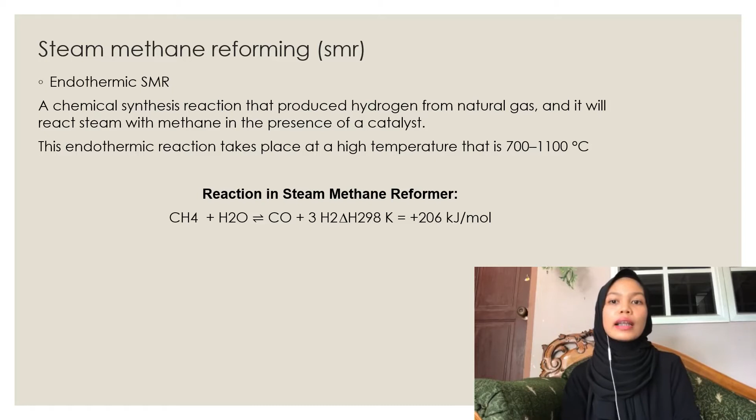The first step is endothermic SMR. This reaction is a chemical synthesis reaction that produces hydrogen from natural gas, and it will react steam with methane in the presence of catalyst. This endothermic reaction usually takes place at a high temperature, around 700 until 1100 degrees C.

The second step is exothermic water-gas shift reaction, or WGS. It is an exothermic reaction that reacts carbon monoxide and water vapor to form carbon dioxide and hydrogen. This reaction runs at a lower temperature, around 200 until 400 degrees C.

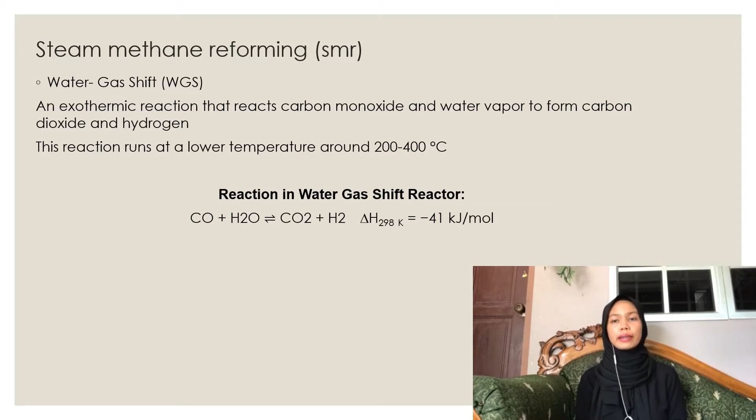As mentioned, steam methane reforming is a catalytic process, and it uses active metals to increase the rate of production because catalysts can speed up the reaction. Based on the article Kinetic Study and Modeling of Steam Methane Reforming, catalysts such as nickel and ferrum were added in aluminum oxide form to speed up the rate of reaction.

The catalyst that we decide to use in our plant design is 18 weight percentage of nickel aluminum oxide. The reason we choose nickel-based metal is because it can withstand a very high temperature, up to 1100 degrees C, and it exhibits good mechanical strength.

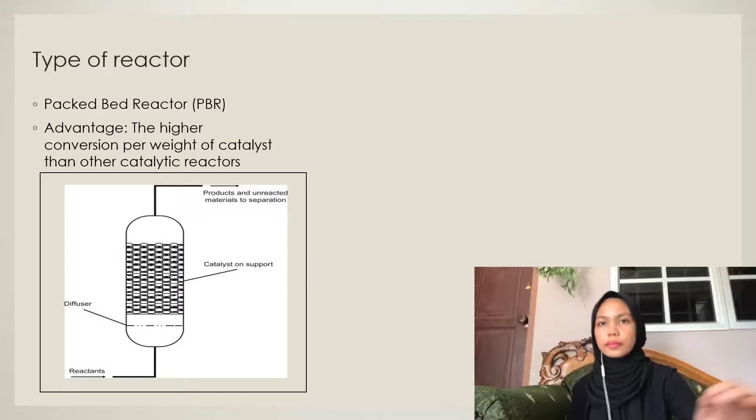The type of reactor we have chosen for our plant design is packed bed reactor, or PBR. The advantage of using packed bed reactor is the higher conversion per weight of catalyst than other catalytic reactors. The conversion is based on the amount of solid catalyst rather than the volume of the reactor.

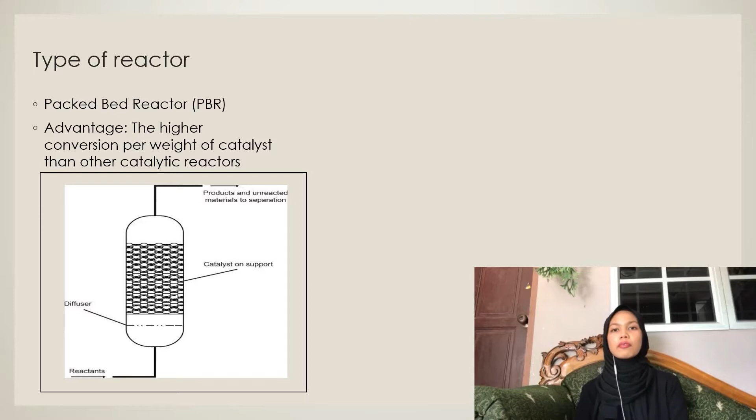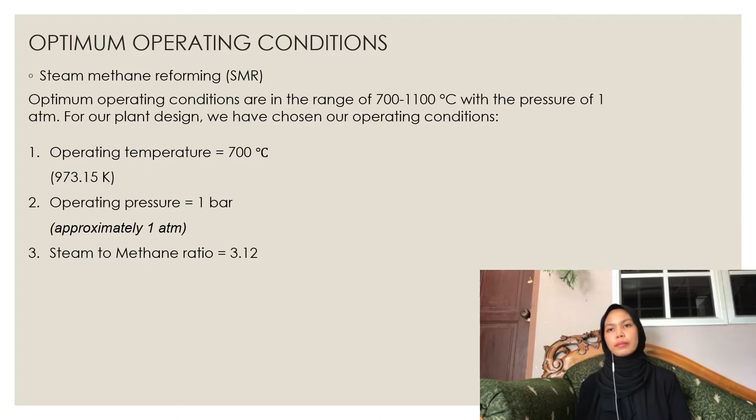According to Abbas, Dupont and Mahmud, for a steam methane reformer with a nickel-based catalyst, the optimal operating conditions are in the range of 700 until 1100 degrees C with a pressure of 1 atm. For our plant design, we have chosen our operating condition: operating temperature is 700 degrees C, operating pressure is 1 bar, approximately 1 atm, and steam to methane ratio is 3.12. The optimum operating condition for the water-gas shift reaction is around 300 until 400 degrees C.

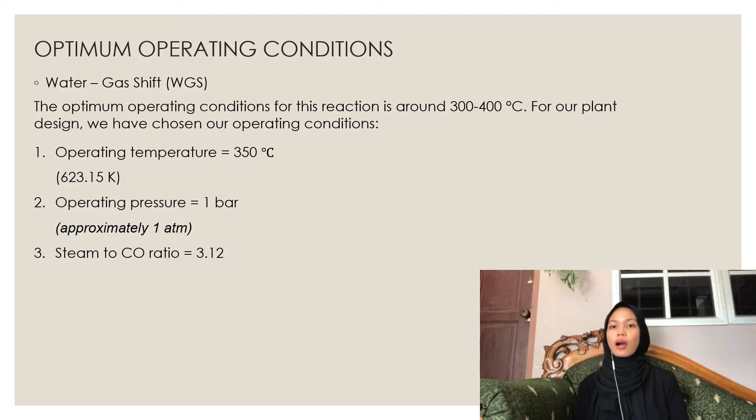For our plant design, we have chosen our operating condition: operating temperature is 350 degrees C, operating pressure is 1 bar, and the steam to CO ratio is 3.12.

Right now, I'm going to talk about the overall system design of the hydrogen production plant. Based on the process flow diagram, the PFD, CH4 enters the SMR reactor and reacts with H2O to produce CO and H2.

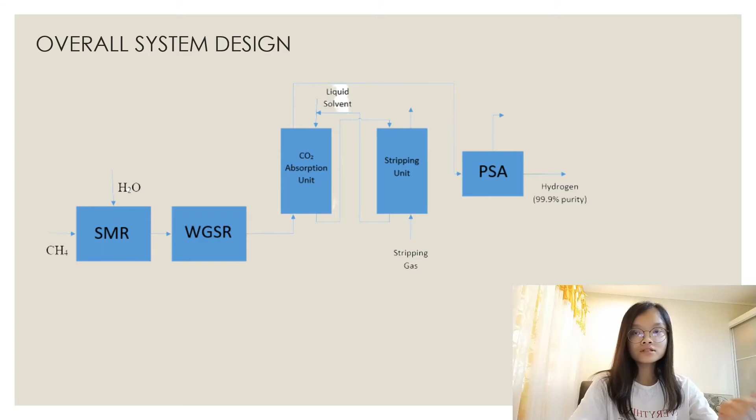The outlet gases of the SMR are then sent to the WGSR, where CO will react with H2O to produce CO2 and H2. So in the outlet of the WGSR, there are actually 5 gases, which are CO, CO2, H2, CH4, and H2O.

Since we are going to get a purity of 99.9% of hydrogen gas, we have to eliminate the undesired gases one by one through separation units.

First, these outlet gases of WGSR are sent to the CO2 absorption unit, where only CO2 will be removed. But the percentage of removal of CO2 at the absorption unit is not 100%, meaning it is impossible to achieve 100% removal of CO2 at the CO2 absorption unit. This means that at the outlet of the absorption unit, there will still be CO2 remaining, although the amount has been reduced.

So this outlet gases of CO2 absorption unit is then sent to the PSA unit, where in the PSA unit there are actually around 10 units in which undesired gases will be removed one by one, and at the end you will get a final product of 99.9% purity of hydrogen gas.

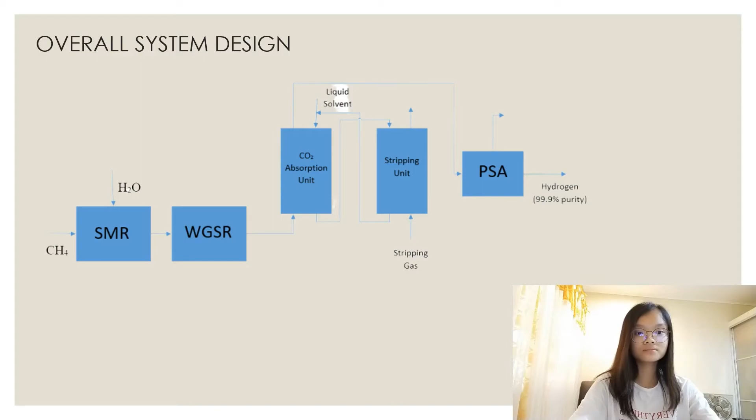So the kinetics data of the reactors are actually very important, especially when determining the sizing of reactors suitable for the production of 30,000 tons per year of hydrogen.

Right now I'm going to show the methods I used to obtain the kinetics data of both reactors, which are the SMR and WGSR.

First, derivation of the equation is performed by using the mole balance of packed bed reactor, stoichiometry, and the Rate Law equation. From this derivation, a final equation is obtained: ln(dW/FA0 dx) equals negative alpha ln(Ca) minus ln(K). From this equation, the reaction order alpha and rate constant K are obtained by plotting the graph of ln(dW/FA0 dx) versus ln(Ca).

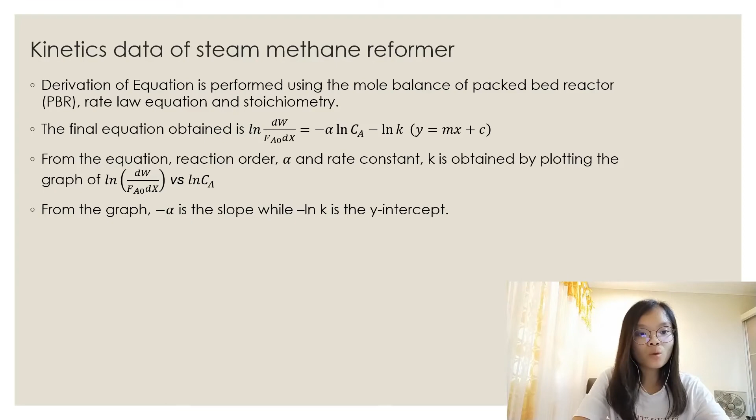From the graph, the slope is actually the negative alpha, while the y-intercept is actually the negative ln K.

To do this, a set of data of conversion of reactants X and pseudo contact time W over F naught is obtained from the article by Abbas. From this set of data, the reaction order and rate constant K can be obtained through the analysis of rate data by differential method.

By differential method, the conversion X and the pseudo contact time W over F are converted to ln(dW FA over FA naught dX) and ln Ca. From this converted data, a graph is plotted using Excel to obtain the alpha and K.

The alpha and K obtained for the reaction of steam methane reforming are 2.1058 and 4481.44 respectively. For the water-gas shift reaction, the alpha is 0.8838 while the K is 3.638.

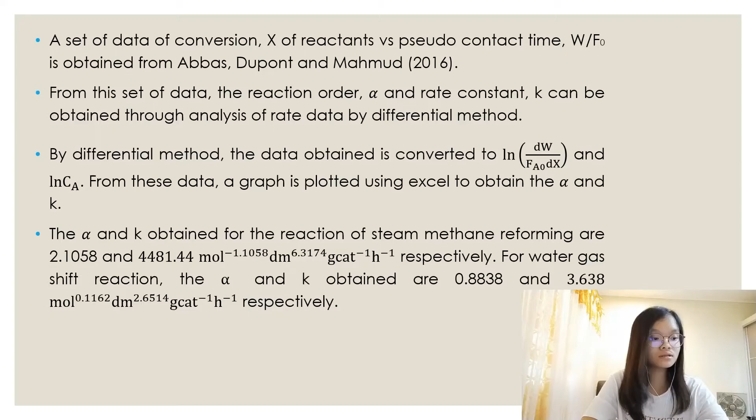The sizing of both reactors have to be determined in order to obtain the suitable size of both reactors required for the production of 30,000 tons per year of hydrogen gas. So, in order to calculate the sizing of reactor, the weight of catalyst have to be determined first by using the data given by Abbas.

The mole balance equation for the packed bed reactor is used in this case, and the reaction order alpha and the rate constant K obtained from the previous section are also used. Energy balance has to be performed in order to obtain the equation of temperature that varies with X, because this is a non-isothermal reactor, meaning T varies with X.

In this energy balance section, the activation energy has to be known in order to perform the energy balance. The activation energy involved in this calculation is obtained from the article by Abbas.

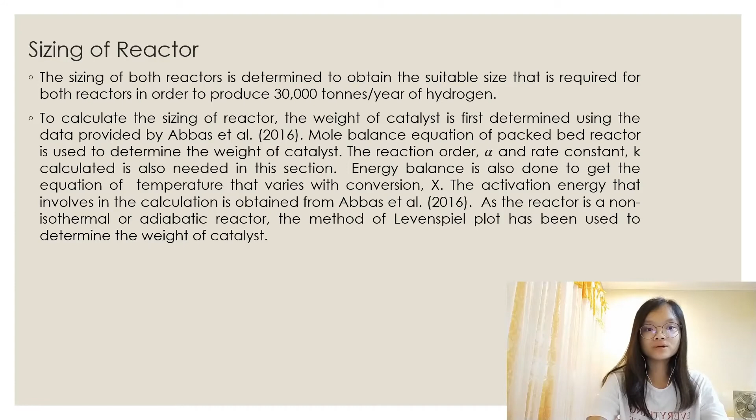As the reactor is a non-isothermal reactor, the method of Levenspiel plot is used for the calculation of the weight of catalyst. The weight of catalyst calculated for the SMR reactor is 13634.08 kg, and the weight of catalyst calculated for the WGS reactor is 246422.08 kg.

From the weight of catalyst, the volume of reactor can be obtained through the formula W equals rho times V, where rho is bulk density and V is volume of reactor.

Since the bulk density of catalyst is not given, while the solid density of catalyst is given, we have to use the formula rho B equals rho C times (1 minus bed porosity) in order to obtain the value of bulk density, which is used in the calculation of volume of reactor.

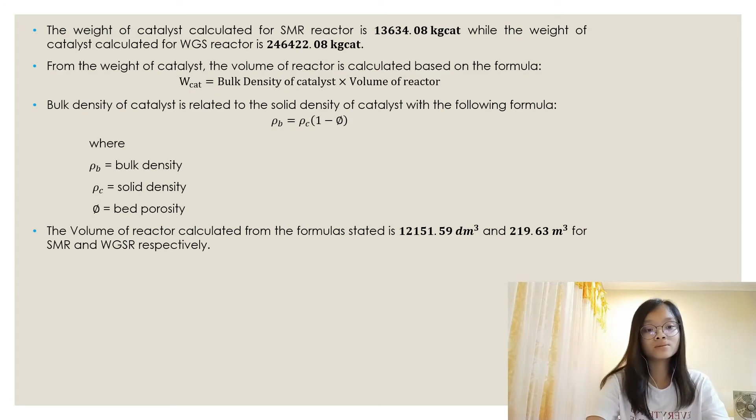The volume of reactor calculated from the formula is 12151.59 dm cube and 219.63 m cube for the SMR and WGS reactor respectively.

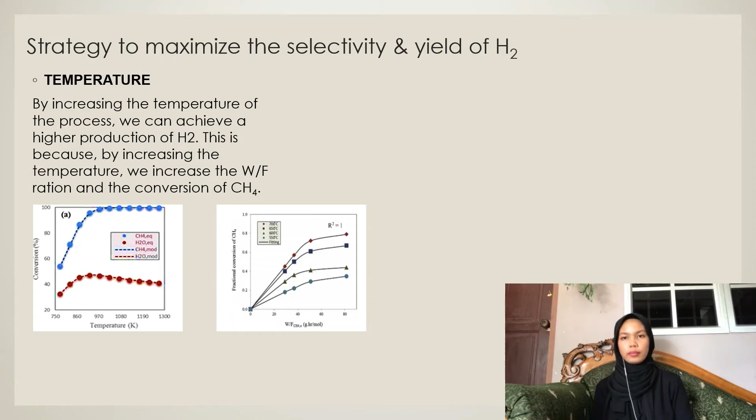Other than that, there are several parameters that we can change to increase the conversion of reactant. The first one, temperature. According to Abbas, Dupont and Mahmud, temperature has a positive effect on purity and yield of hydrogen up to a peak value corresponding to complete CH4 conversion. By increasing the temperature, we increase the W/F ratio and the conversion of CH4. This can be seen from the graph below.

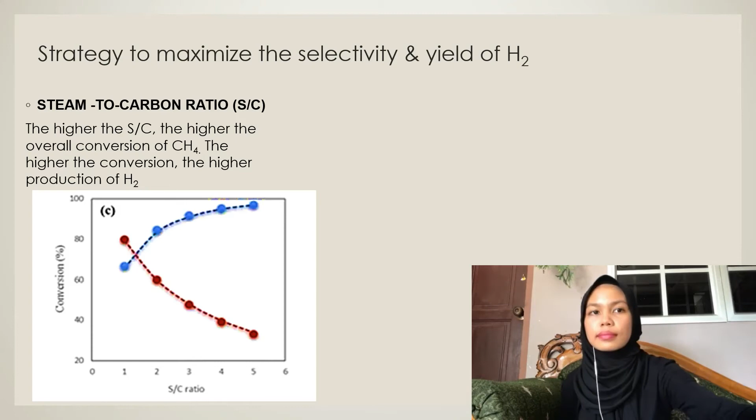The other way to maximize the production of hydrogen is by altering the concentration of the catalyst, because the concentration of the catalyst will directly affect the reaction time of the steam methane reforming reaction. The higher the concentration of catalyst, the shorter the time we need to produce our targeted product. This will also save the cost of producing 30,000 tons per year of hydrogen.

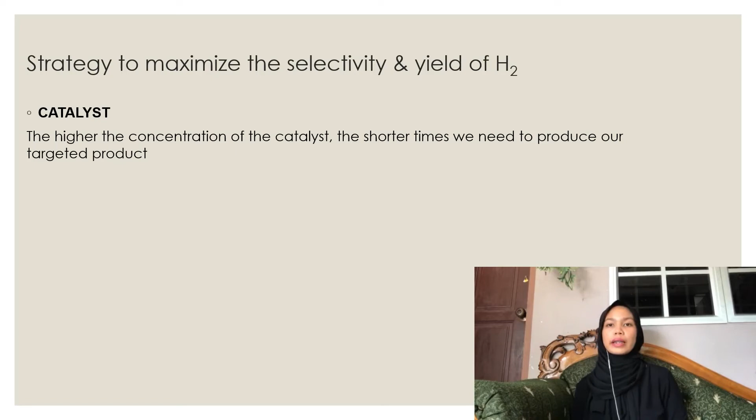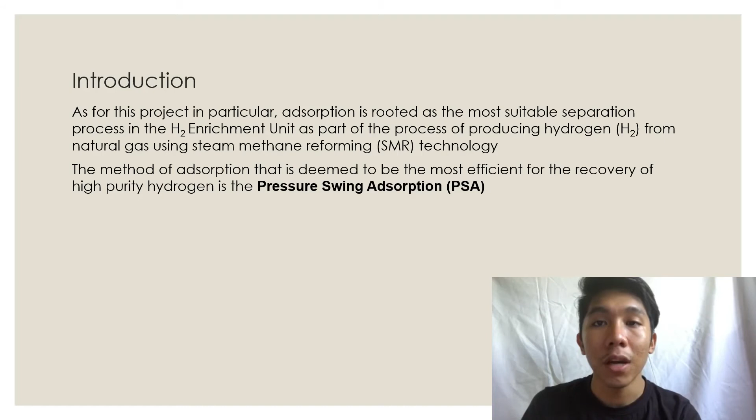As for the separation process in particular, adsorption is identified as the most suitable separation process in the H2 enrichment unit, as part of the process of producing hydrogen from natural gas using steam methane reforming.

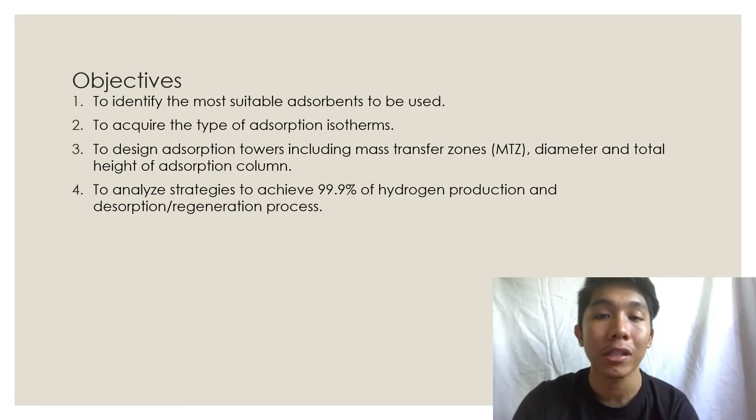There are four objectives in the separation process. The first is to identify the most suitable adsorbent to be used. The second is to acquire the type of adsorption isotherm. The third is to design the adsorption tower including MTZ, diameter and total height of the adsorption column. The last is to analyze strategies to achieve 99.9% of hydrogen production and the desorption or regeneration process.

So we go to the type of adsorbent used. The adsorbent must have, first, high selectivity and absorption capacity for carbon dioxide. Second, adequate adsorption or desorption kinetics for carbon dioxide at operating conditions. And third, stable adsorption capacity of carbon dioxide after repeated adsorption or desorption cycles.

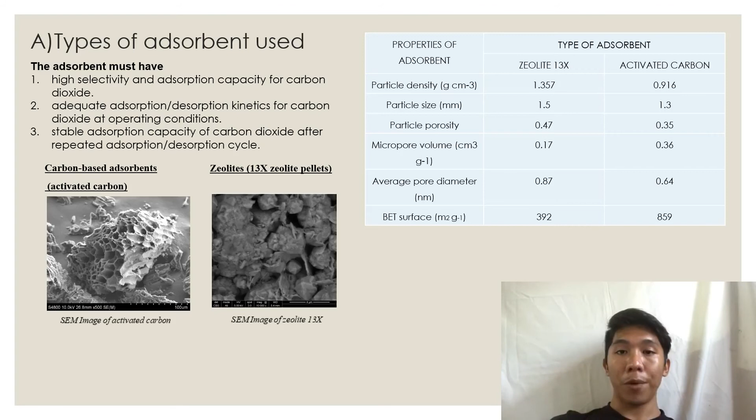The isotherms were fitted with a dual Langmuir model, and the parameters are available in literature. The single component isotherms were used in the theoretical expression for prediction of the multi-component behavior.

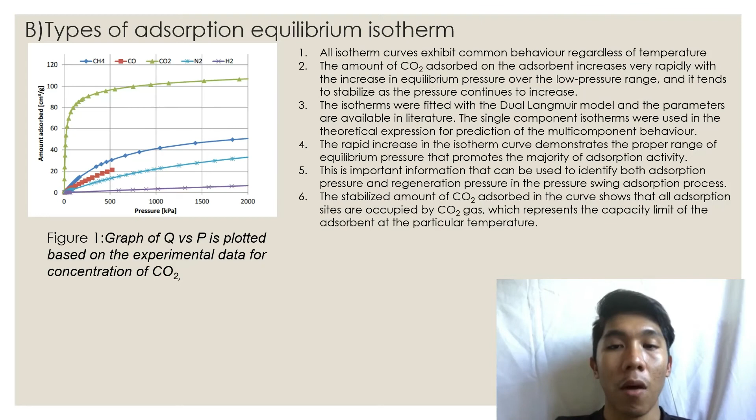The rapid increase in the isotherm curve demonstrates the proper range of equilibrium pressure that promotes the majority of adsorption activity. This is important information that can be used to identify both adsorption pressure and regeneration pressure in the pressure swing adsorption process. The stabilized amount of CO2 adsorbed in the curve shows that all adsorption sites are occupied by CO2 gas, which represents the capacity limit of the adsorbent at that particular temperature.

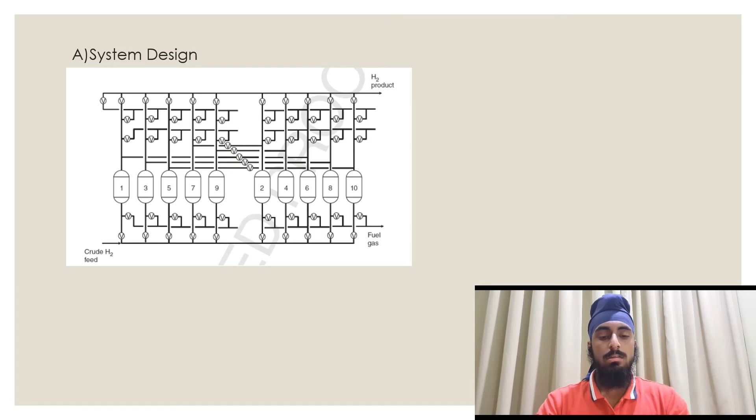Upon deciding the type of adsorbent that we're going to use for our design, we moved on with the design itself. So we begin our designing by starting off with the breakpoint time as well as the mass transfer zone. Based on the article that we referenced, it provided us with an experimental breakthrough curve for CO2 adsorption in the simulated towers.

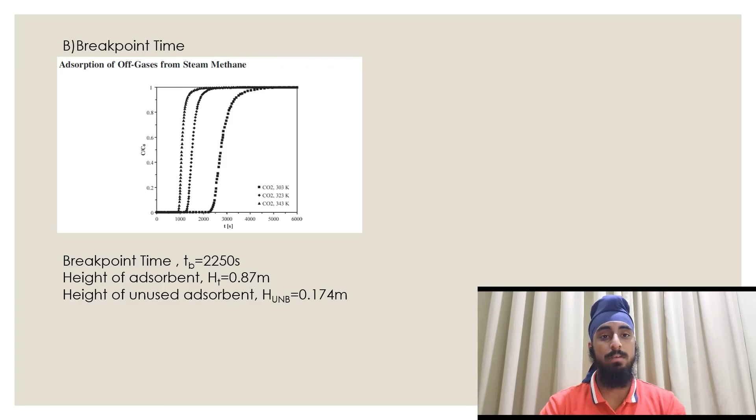Based on the simulated values, it has been found that the breakpoint time, TB, is given as 2250 seconds. The height of adsorbent has been given as 0.87 meters, and the height of unused adsorbent, HUNB, has been given as 0.174 meters.

Since these are all simulated and experimental values, we needed to do relevant calculations for scale-up purposes. Based on the data provided from the breakthrough curve specifically, and also the article itself, we have done a series of relevant calculations using relevant formulas that we have learned, and we have found that the new total height of the adsorption tower for scale-up reasons is 4.924 meters.

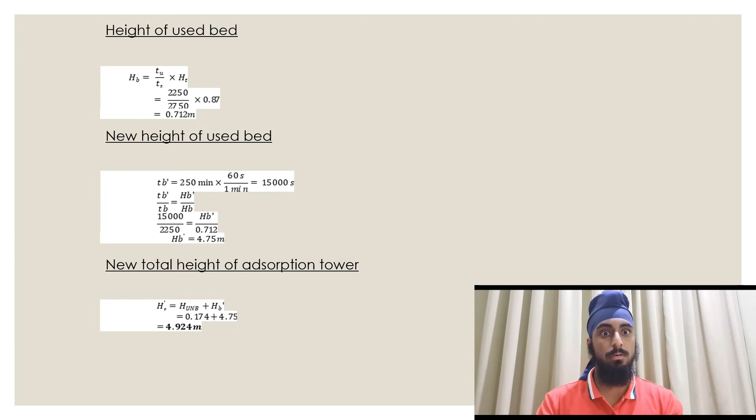Hence, our calculation has proven to be accurate since these are the scale-up specifications provided in the article itself, which says that the tower height is equivalent to 4.924 meters, the column diameter is 0.021 meters, and the mass of adsorbent that has to be used is 0.176 kilograms.

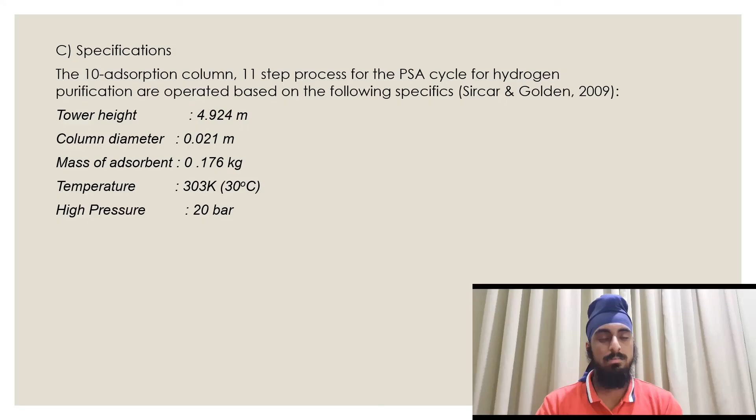Moving on to the strategies to achieve 99.9% of hydrogen production, our group has suggested the following strategies. The first strategy is to use longer bed length with reasonable breakthrough time and cost.

A longer bed contains more adsorbent, which allows longer online time before regeneration is needed. Moreover, bed utilization efficiency increases with bed length because the unused part becomes a smaller portion of the overall bed. Hence, the longest bed length has to be chosen, one that provides reasonable breakthrough time, pressure drop, and cost.

Moving on to the second strategy, that is the purge and depressurization strategy. The proposed PSA sequence increases the H2 recovery by introducing a purge step, which uses a recycle of CO2 rich stream and a pressure equalizing step.

The H2 recovery from the syngas can be increased over 98% by providing a sufficient purge flow of syngas. The bed size and the energy consumption for the compression of CO2 rich gas are much smaller than those of other PSA processes that have a CO2 compression system to increase the product purity and recovery of H2.

The third and final strategy is to use the electrochemical method. The separation of uncharged species in a typical membrane process is driven by a chemical potential gradient. General membrane separation depends on the pressure gradient to drive one component of the particular mixture.

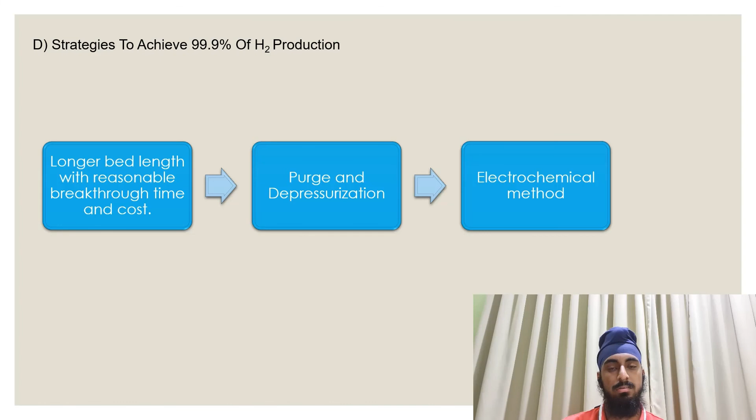The electrolytic transport of hydrogen in the form of protons across a solid polymer electrolyte in an electrolysis cell is how this method works. Through the supply of direct current, hydrogen can be electrochemically transported across the membrane, and this in turn brings about higher purity of hydrogen.